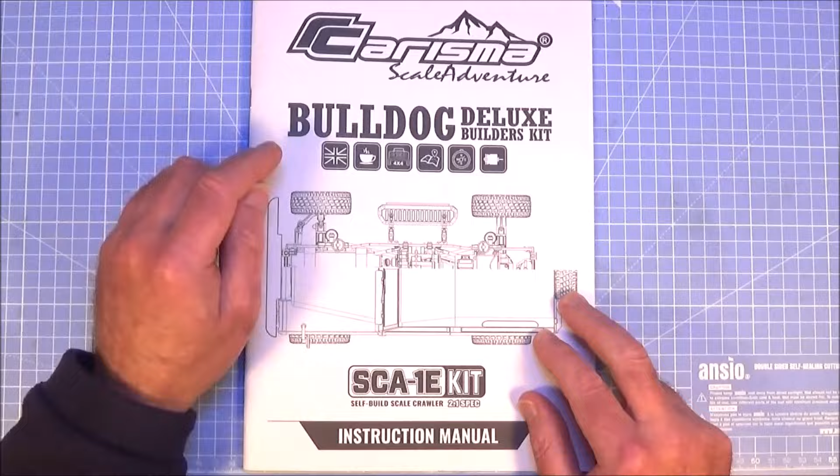Hi there, it's Mark here again and welcome to part 3 of my build guide for the Carisma Bulldog Deluxe Builder's Kit, which is on the SCA1E 2.1 spec chassis. We got to the end of parts bag H last time, which was building the gearbox, as you can see here, ready to go. So let's crack on with the build.

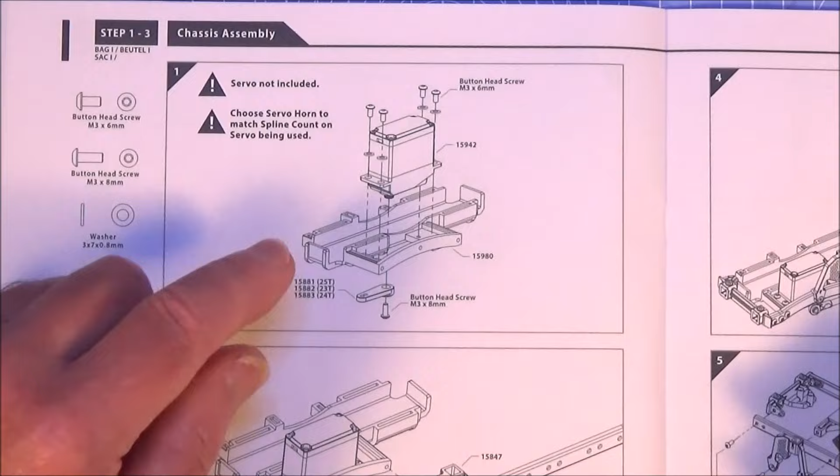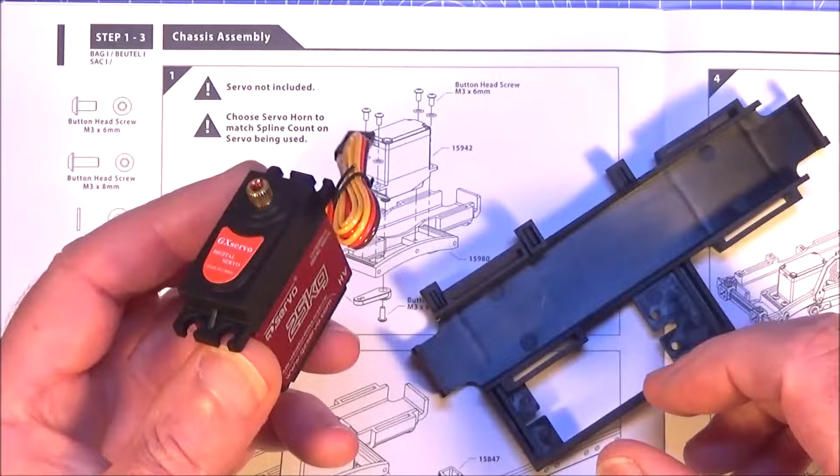And the next step is to open up bag I, and step 1 is the servo, fitting the servo to the plastic bracket, which is this part here. So basically align the bracket in the same orientation as in the diagram. Get your servo. As you can see, I'm using this 25 kilogram unbranded servo, or actually it's a QX servo, and I've gone ahead and centered this up, so make sure you connect this to all your electronics. Get your transmitter in neutral, give it a wiggle around and make sure that goes into the neutral position before you do this.

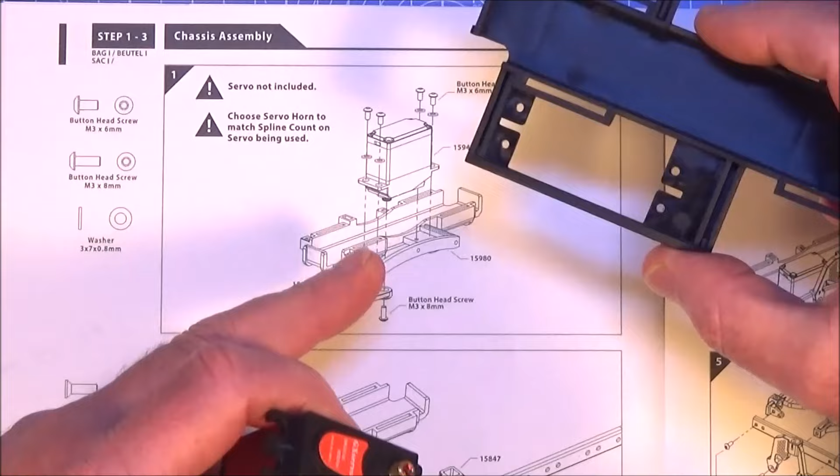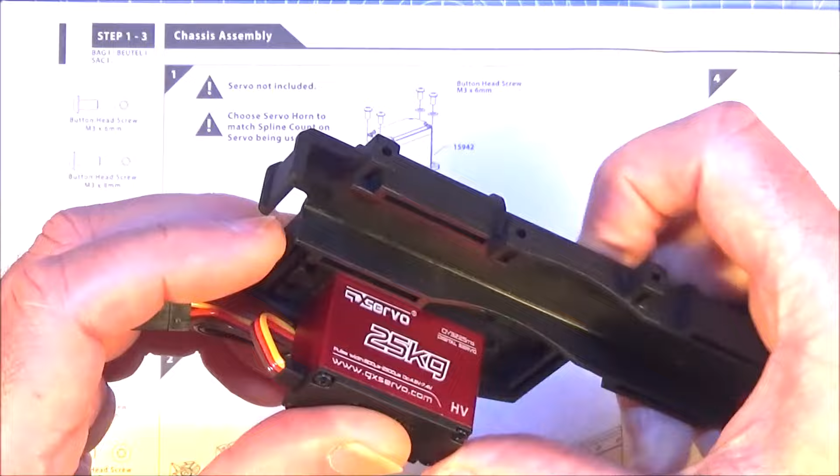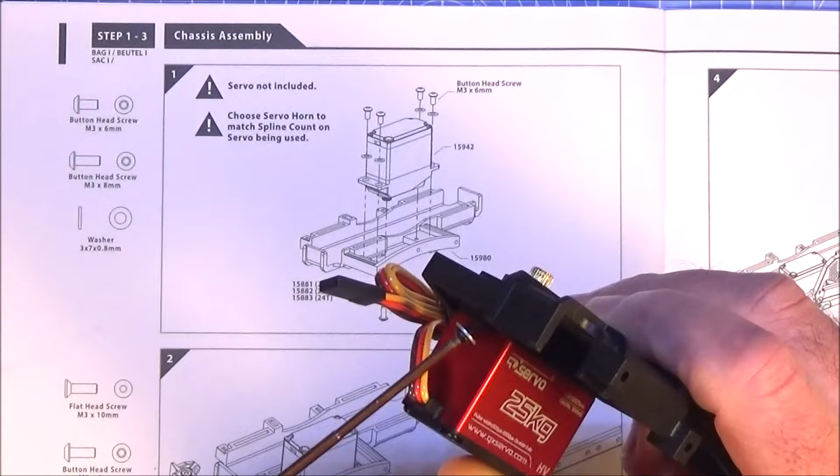Okay, so what we're going to do is fit it as it shows there, which is with the output of the servo pointing to the front, and that just pops onto there, and there are 4 holes that we've got to get the screw through to. For that you've got 4 3x6 screws, and put the little washer on there, and basically just simply fit the 4 through the servo and into that plastic bracket.

Okay, so hopefully you can see the 4 screws are in now, and they are very short, so don't try and torque them up too much because they only go into the plastic 2 or 3 millimeters. But with 4 of them I think it's strong enough to hold that securely. So we just flip this over and we've got to mount on our servo horn.

There are 3 to choose from that will fit your servo in the kit, but I'm not going to use these plastic ones because I've got an aluminium hop-up, which is this little beauty here, and this needs to be aligned pointing straight to the left as you look at it now. So get it as straight as you can. It won't ever exactly line up to being horizontal like that, but get as close as you can.

And this servo has got a metal output, so I've put a bit of thread lock in there, and it's just a 3x8 screw that holds that on. And this servo horn has got the extra security of these little screws that clamp it onto the servo output, so that's a nice little feature with these servo horns. And that's the end of step I1.

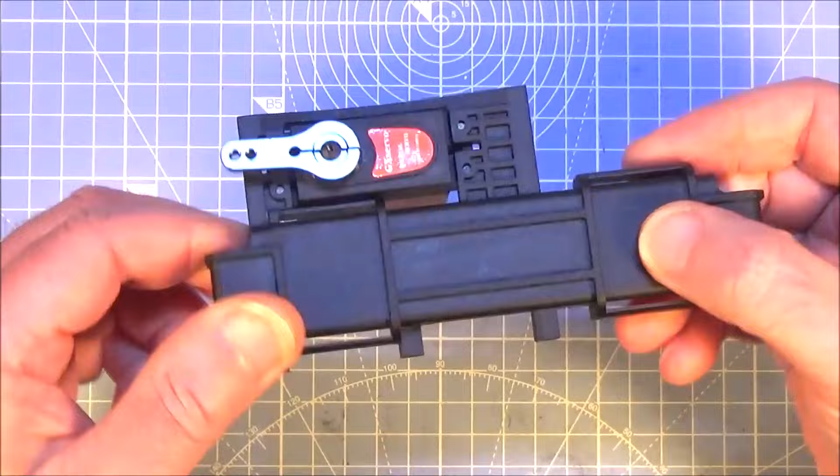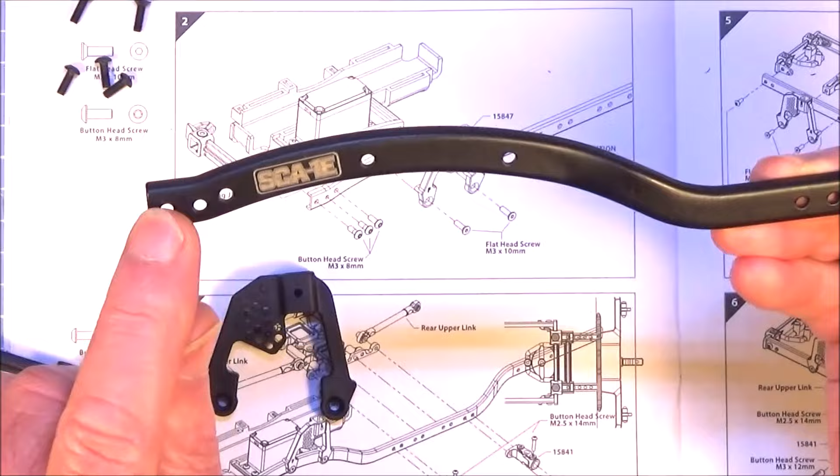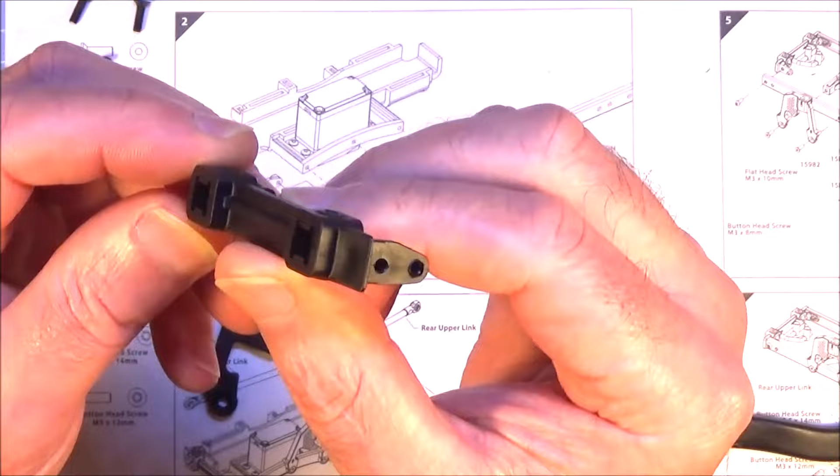For step I2 you're going to need to get your metal chassis rail out. Make sure you get the right one with the arc like this and the 3 holes at the front. Get another 3x8 in the hole at the front here. You also need this bracket here, which is from bag J. I think it's kind of like the front bumper mount. And what I'm going to do is connect this to the front of the rail there with 2 3x8 button head screws.

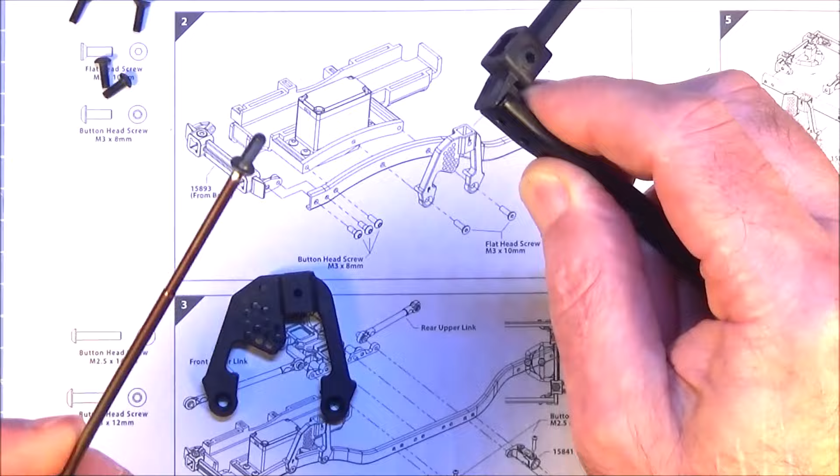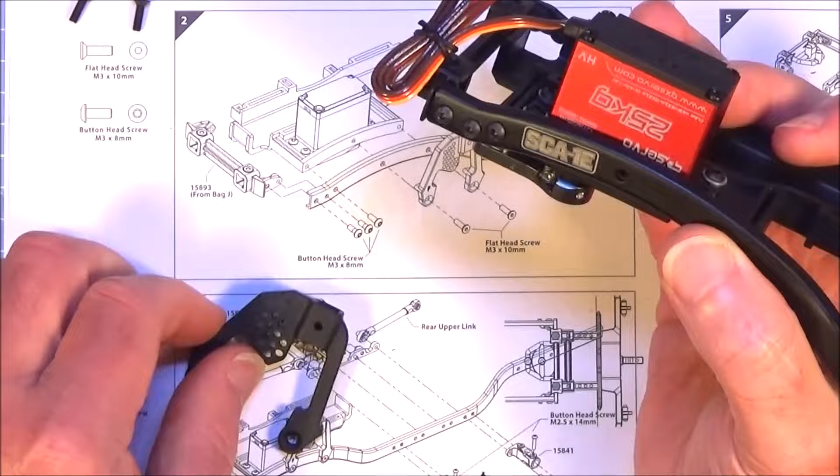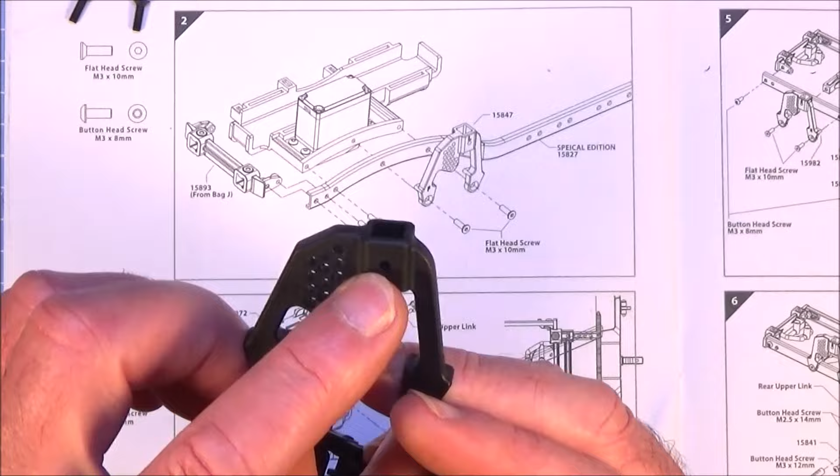Then we've got to get our servo mount and line up the 3 holes in this with the 3 holes in the chassis rail. Okay, once that one's done up, you need to get the front shock mount, and it does say on it, I don't know if you'll be able to see in this light, but it does have an F and an L printed onto that bracket, so that's how you know you've got the right one, and that lines up on the 2 holes that are left.

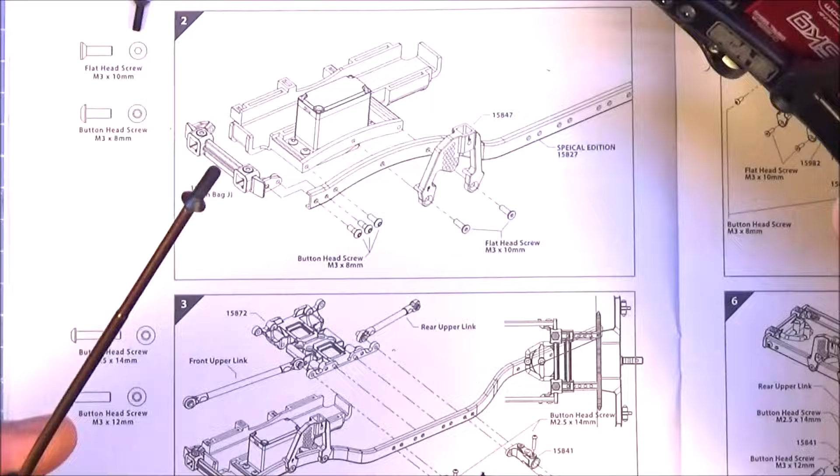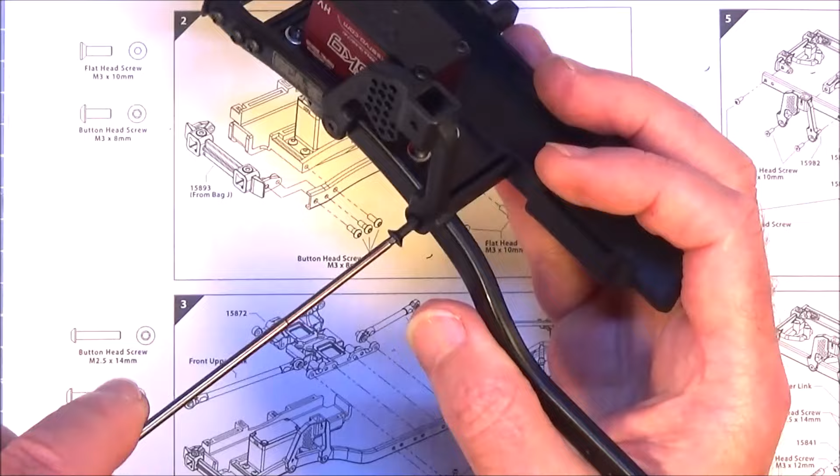And then you've got 2 flathead screws, which are actually countersunk, that are going to go through that bracket, the shock mount, through the rail and into the servo mount. So I'll just get the second screw in the second hole, and that will be the end of step 2.

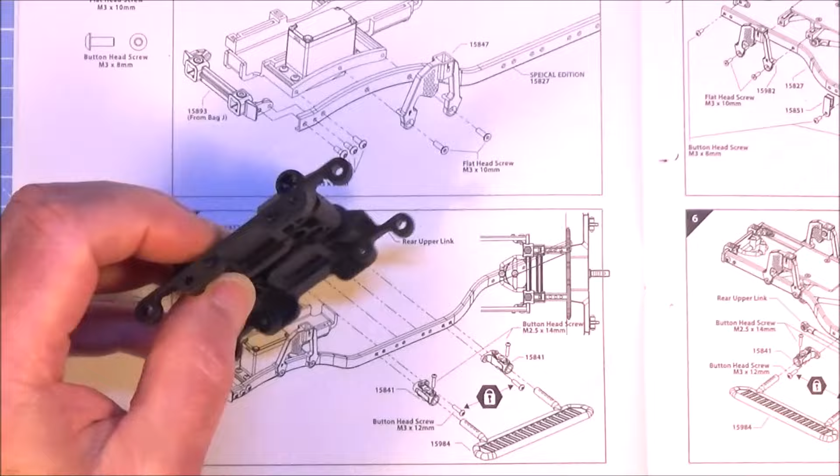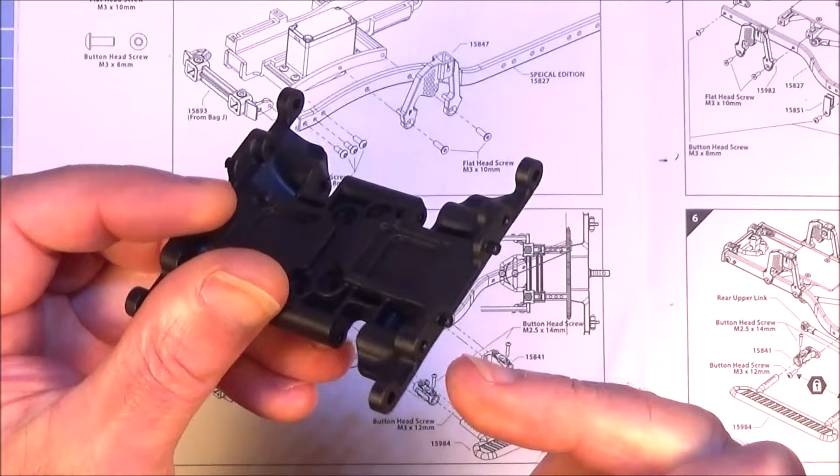In step 3 we're going to be fitting this plastic part, which is like the central part of the chassis that holds the motor, I think, or the gearbox, and it looks like this. Make sure you've got it the right way around, and then we've got to put the 2 lugs that are sticking out there into the 2 holes that are central on that straight part of the chassis, so like that.

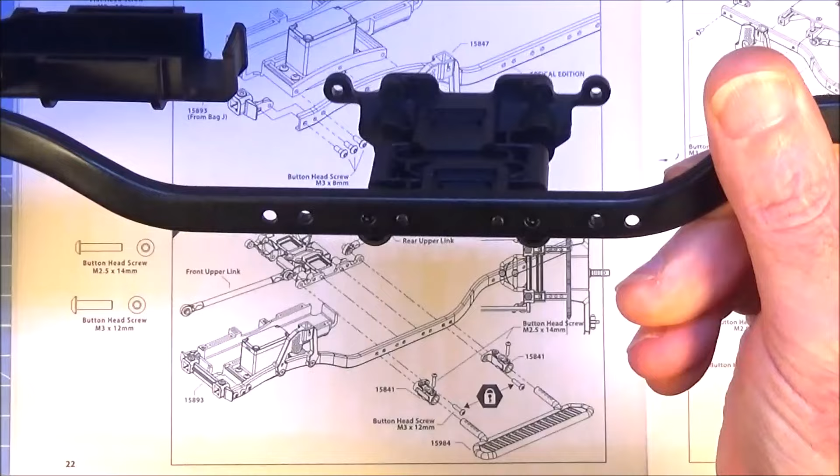Then you want these little plastic brackets. We've got 2 of these, one at the front and the back, that's going to hold that bracket and the upper links. So if we just first put the screw through that hole, then we're going to go into that hole there, just get it started. Then you've got your front upper link,

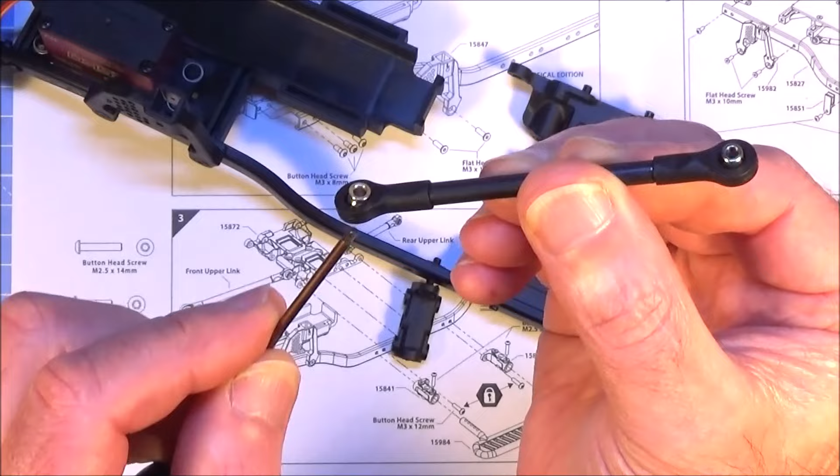and you want the end that's got the thread in it and the flat end rather than the standard ball, and you want to put the screw into the side that's got the flat on it, so not the straight end but the flat side, and I have put some thread lock inside that ball. So just get it lined up with that screw, and I'll go ahead and tighten that up.

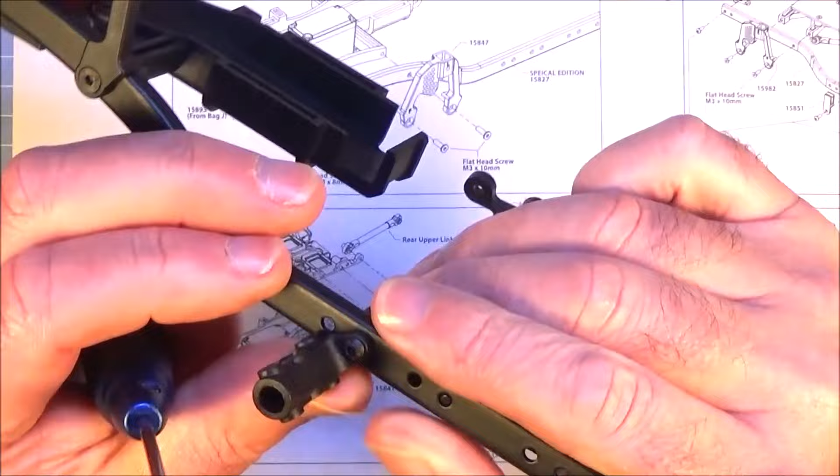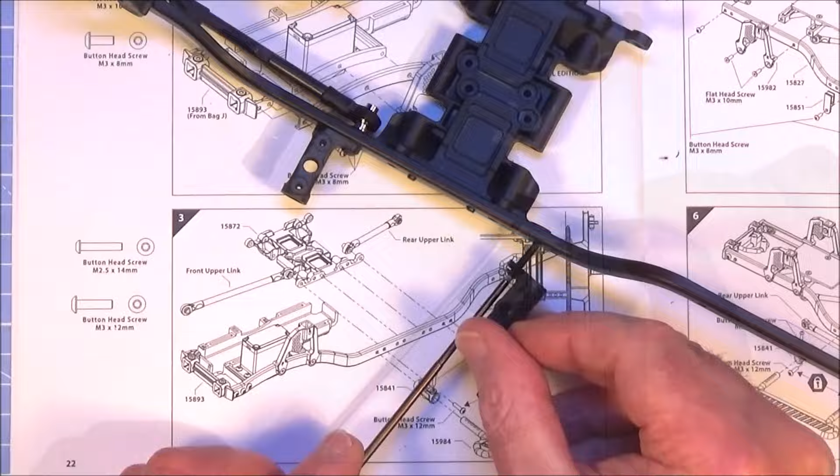As we've got it tighter, just need now to make sure that that is aligned like so. I'll just give that a little nip up. So then we'll do exactly the same, get another one of those brackets and pop that through. And it goes through that hole again, which goes into the plastic central part.

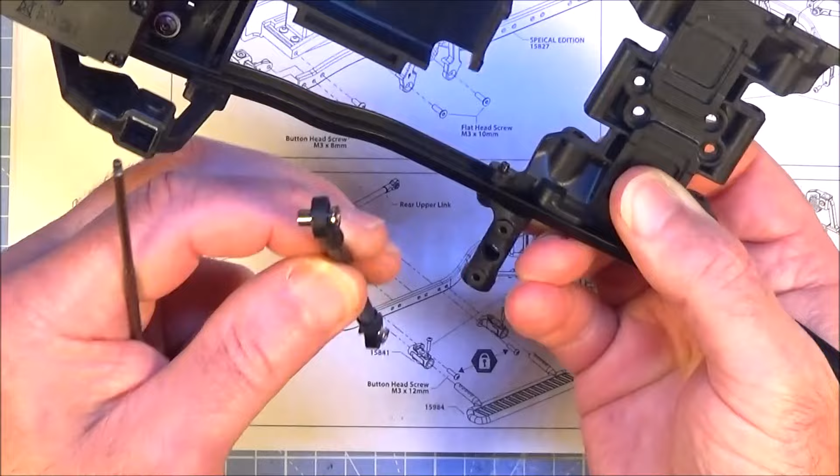Get the front upper link, and again what we want to do is get the flat of that end with the thread in it, and we're going to screw into that through the bracket. I don't know if you can see out there, it's a bit fiddly, but yeah, we'll just nip this up. And as it's getting tighter, what we're going to do is get that bracket, and we need to align it correctly, so it needs to be in that position like so.

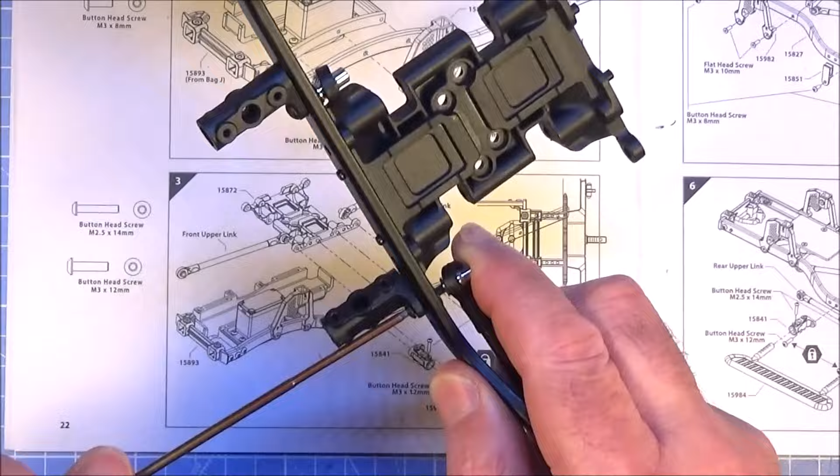And then for the other end, same again, get your 3x12 screw, put it through that plastic bracket, and we're going to go into that last but one hole, and then get the threaded end of the rear upper link, with the flat going towards the bracket, and do exactly the same as we did to the front, just nip this one up, and then you just get your slider bracket, and that's going to pop into the plastic pieces there if they're in the right position.

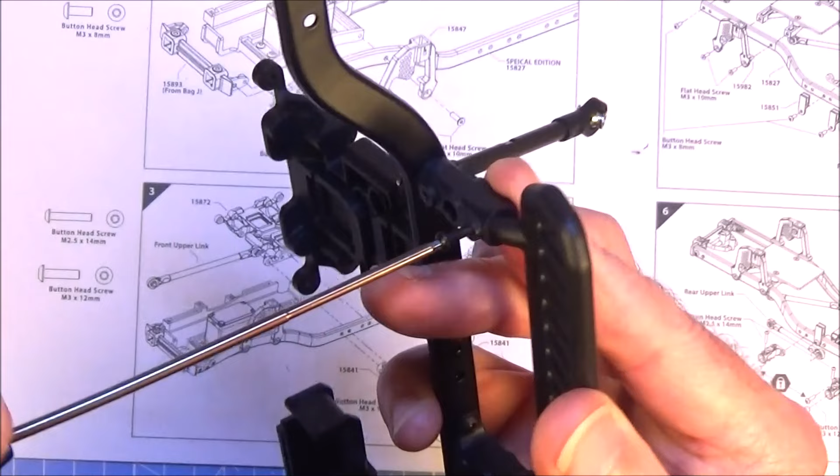And then you've got two of these M2.5 by 14, so they're a bit thinner than the other ones we've been using, the M3s, and you want to screw one into the outside of the holes in those brackets, and then fit the other one in the same outside hole on the other bracket. And when you've done that, that'll be step 3 finished.

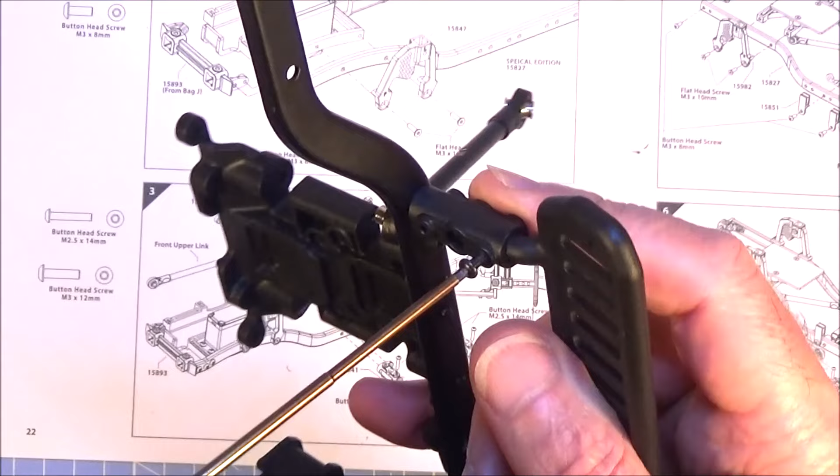But I've got to say, it really is hard to get these little screws started into the plastic. The holes don't seem to be quite big enough, but if you apply a bit of pressure, they do go in.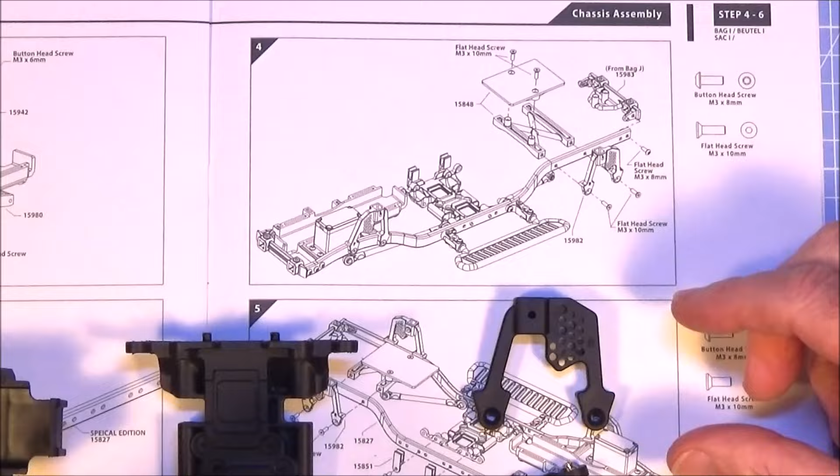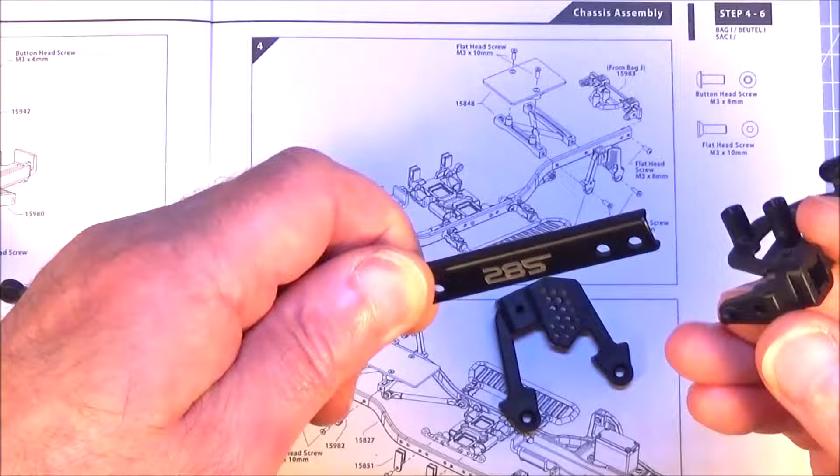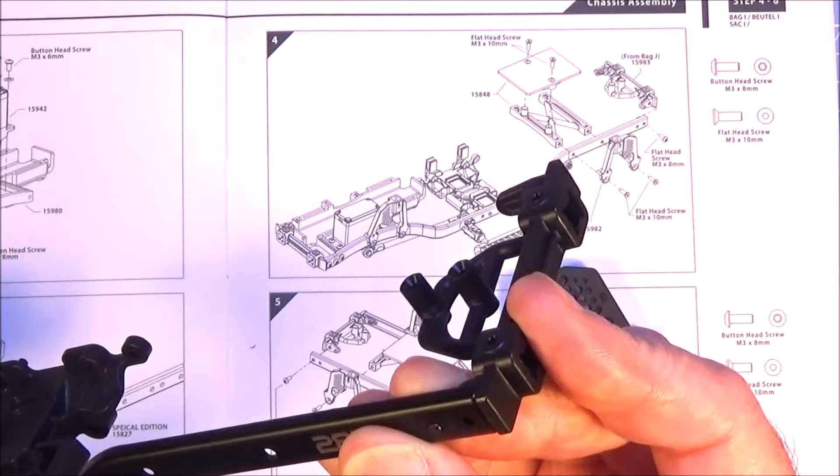On step 4, we're going to fit the rear shock mount, and we've got this again from bag J, this bracket. Make sure you get it in this orientation. There's the two holes at the rear of the chassis, and there is a lug that's going to go and fit through the one hole. You might just be able to see there, and then it's a 3x8 screw that just goes in the hole at the back and holds that bracket on.

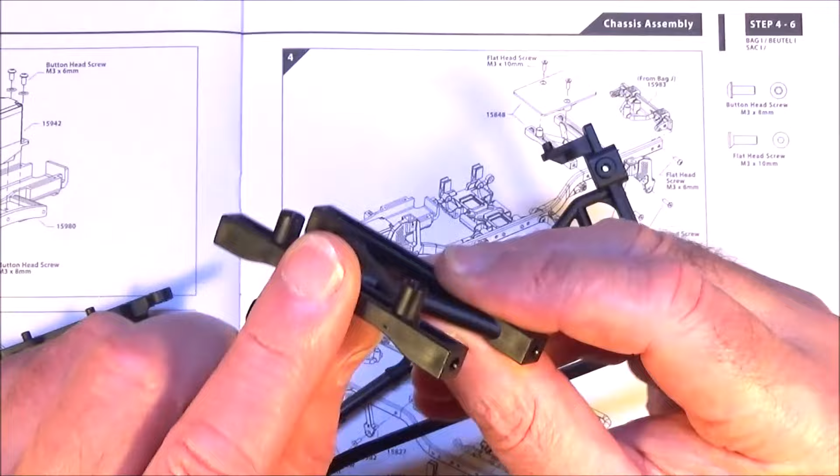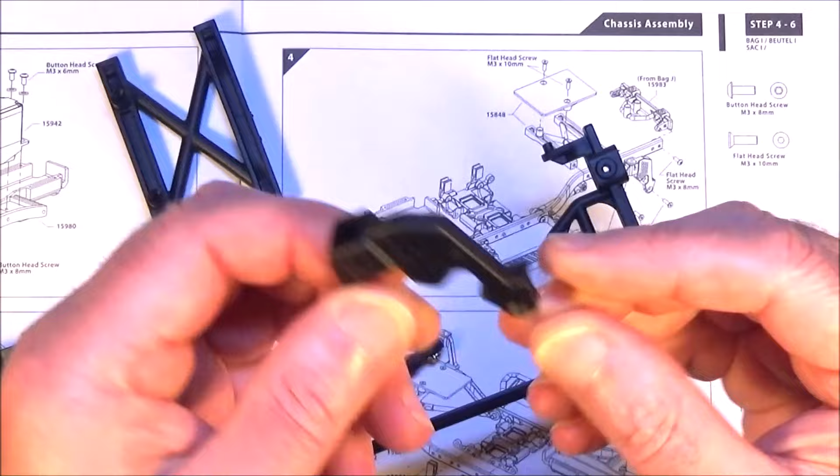So with that attached, then you want this kind of cross bracket, and you want it in this alignment with the kind of lugs pointed upwards. And then you want your left rear, again there's an L and an R printed on there, so that's your left rear shock mount. And again, this is going to go onto those two holes there, and it's going to hold this bracket.

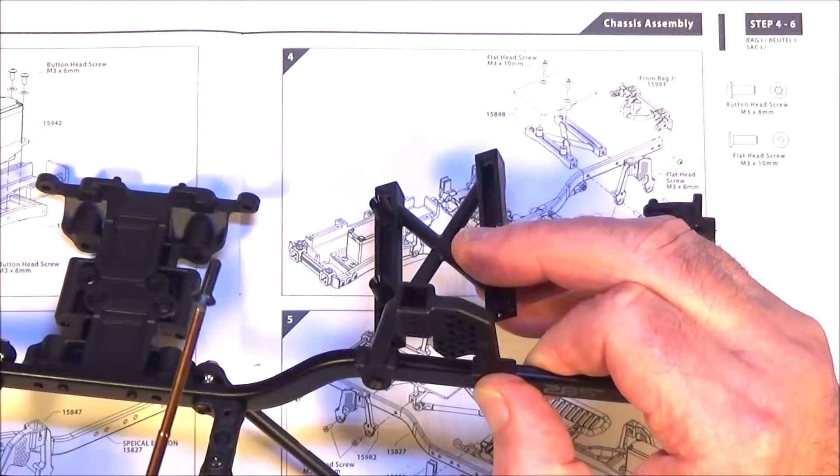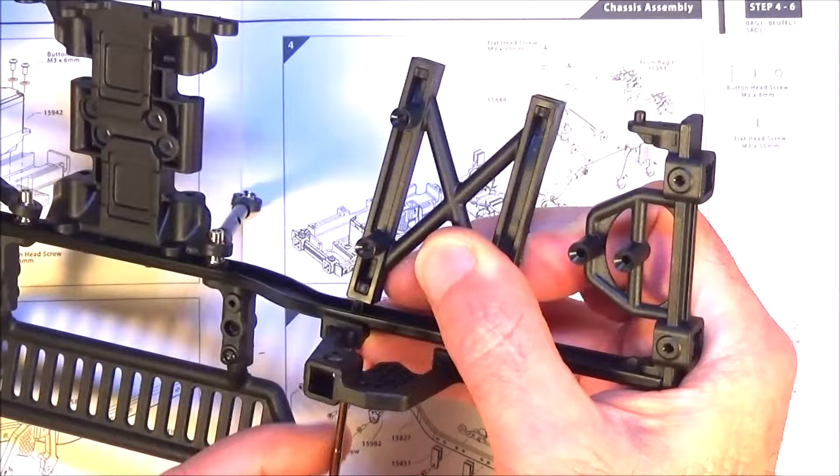Again, a bit fiddly, so get your countersunk 3x10, pop that through, and then get the cross bracket and screw that 3x10 into the hole in the end. As I said, it's a bit fiddly, but get this one done up, and obviously the second 3x10 countersunk goes in the second hole, and again screws into that cross bracket.

And with that attached, it's simply this flat bracket. It's got the two slots underneath, and they just slot onto those two uprights on the cross bracket, and it's simply held in place again with another two 3x10 countersunks.

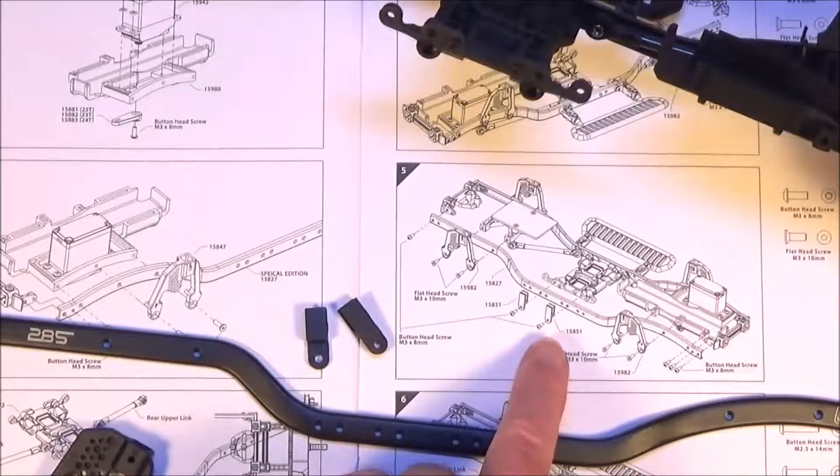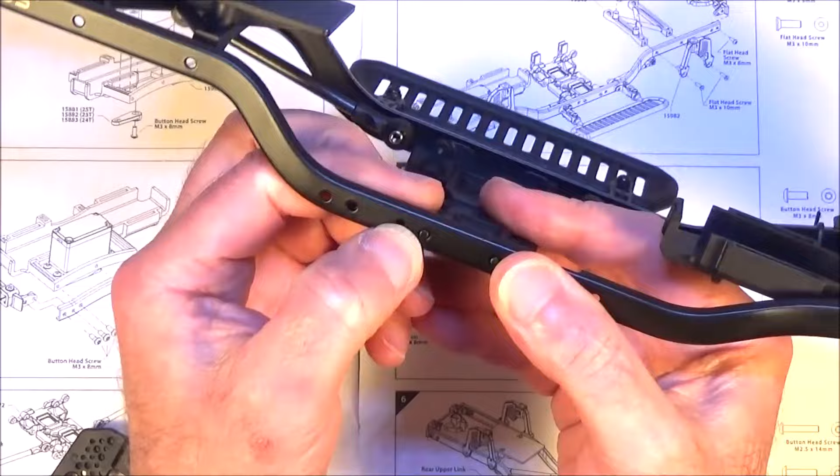So with that finished, we're going on to step 5, where we're going to turn the chassis round, and in this step you can see we're going to put on the other side rail, or the other frame rail, which is this. And I'm just going to start off again by clipping it onto that central part, so the two pins stick through the chassis there. Again, you can line up that pin in that end there. And fixing this on is exactly the same as we've already done for the other side.

So you've got your rear shock tower is going to go through there, the front shock tower is going to go on there. The only difference being these little clips that are going to go into the holes right next to where you can see those two pins sticking through. So it's going to go over that hole, again with the 3x8 button head screw. And as I said, these two little brackets will be the only difference from the way we fitted everything on the other frame rail.

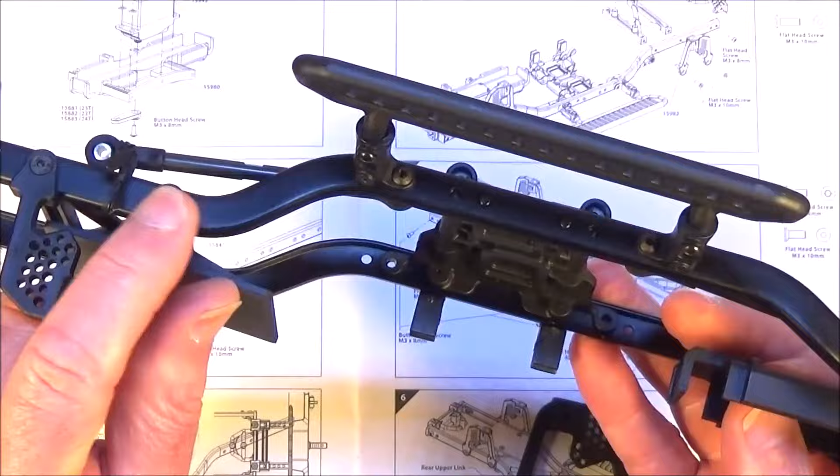And as you might have noticed, I've put some little ties around the front and rear arms because they would keep flapping around everywhere, getting in the way and get on my nerves. So yeah, I advise you do that as well. It saves a lot of hassle. So I'll just go ahead and fit on the two shock brackets and get all the screws in, and we'll have a look at step 6.

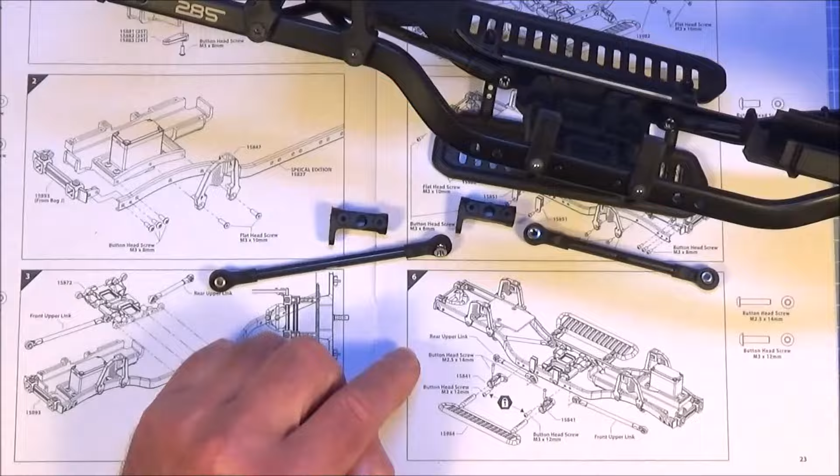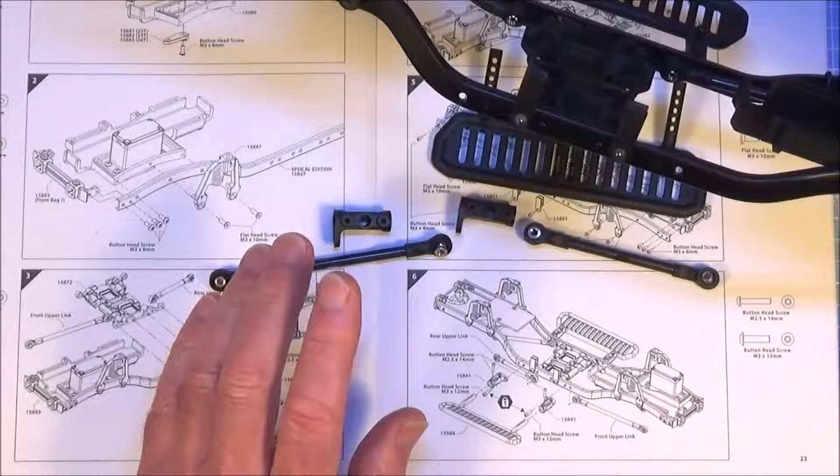Okay then, so that's what it should look like at the end of step 5, and we've got those brackets mounted. And as step 6 is just mounting the front and rear upper links again on those plastic brackets, and then the slider, it's exactly the same as we've already done, so there's no point going over that again. I'll just fit those and we'll move on to the next step, which is step 7, fitting the motor and gearbox.

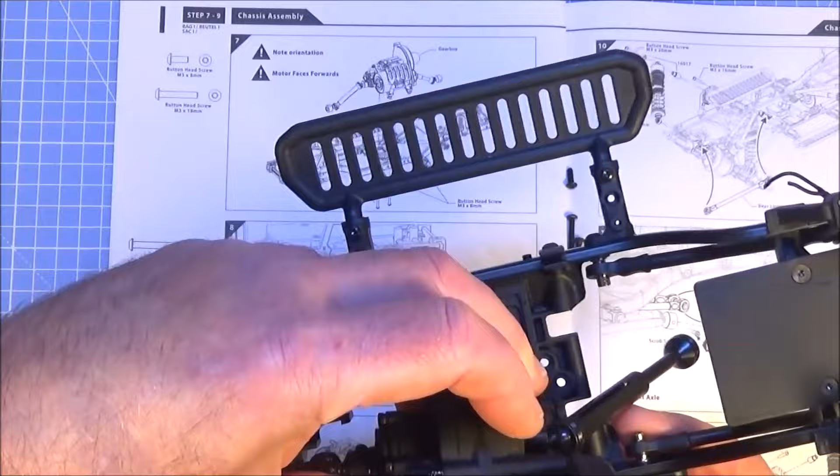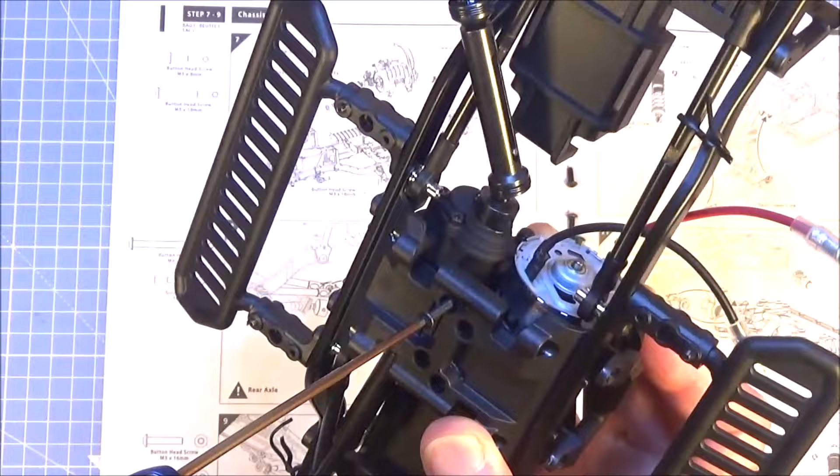And it says note orientation, so with the servo at the front, get your motor and gearbox with the motor pointing to the front again towards the servo, and just fitting those prop shafts, and it should just locate in the bracket in the centre. Yeah, it drops down into this bracket here, and then we've just got to get 2 of these button head screws, 3x18. I had to measure these because they're so close in this bag in terms of length. So that's 1 screw into the hole on the left and the other in the hole on the left beneath it.

Okay, so halt. It does say 3x18mm screws to go into here, but I cannot get them in. This one here, I've just stripped the head on this one. There's just not enough plastic to screw into, so I've put my own. You see that one there, that's stainless steel 12mm, and that does the job perfectly. So word of warning, just be careful with those.

You might have the same problem as me, you might not, but I'm going with my own 12mm screws in those 2 holes. And thankfully the other 2 screws, the 3x8s that go into this bracket here, 1 in the hole there and 1 in the other side of the bracket here, they go in okay. So yeah, just those 2, and that's the motor and gearbox fitted.

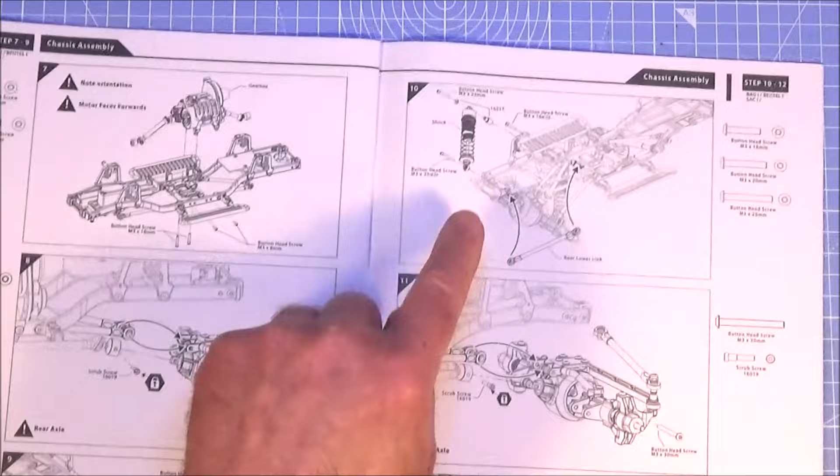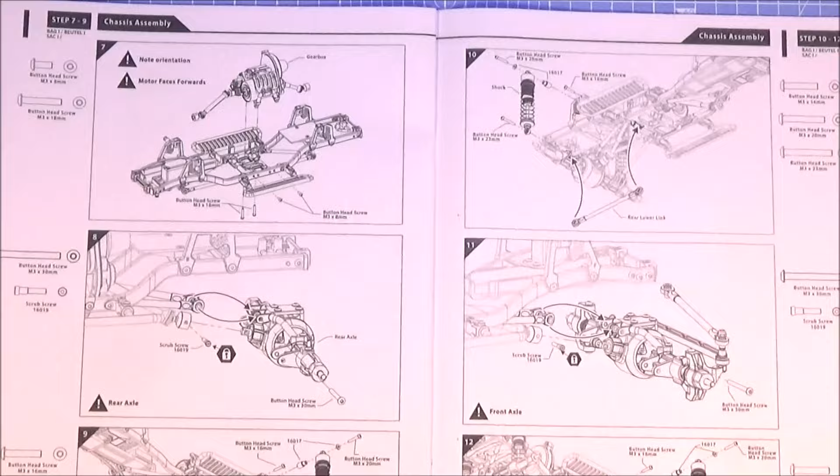In steps 8, 9 and 10, we're going to be fitting the rear axle, connecting up the prop shaft, fitting the lower links and the shocks. As you can see there, I'll just get this out of the way and do that all in one go. Okay, so first thing is get the rear axle, get it in this orientation, and we're going to pop this drive here into the prop shaft, try and line up the holes, get your little grub screw, and you should be able to just pop that in. It is a little bit of a fiddle, but I've got it lined up now, and obviously we just need to nip up this grub screw.

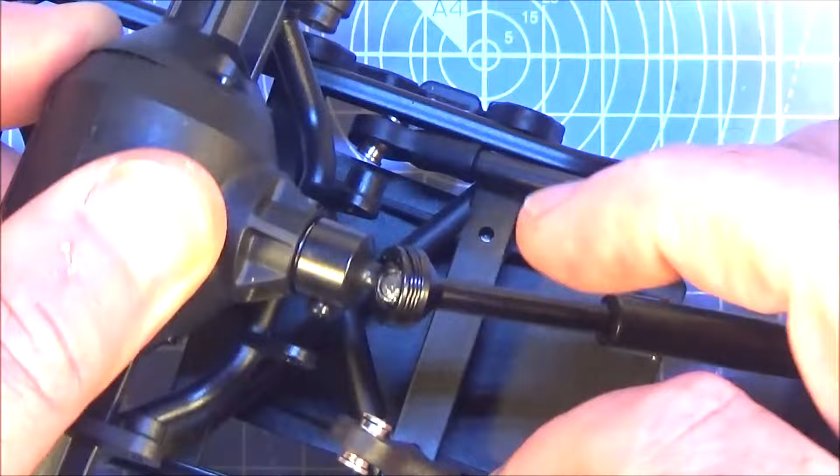And when you've got that done up, you want to get the upper arms, and they've got a slot into the bracket that's on the top of that axle, and then you've got your 3x30 screw, and that's got a thread through the one side. Probably a bit difficult to see this, and then get the other one on the other side of the bracket. Hopefully you can see that, and just get this screw done up, and that's the end of step 8.

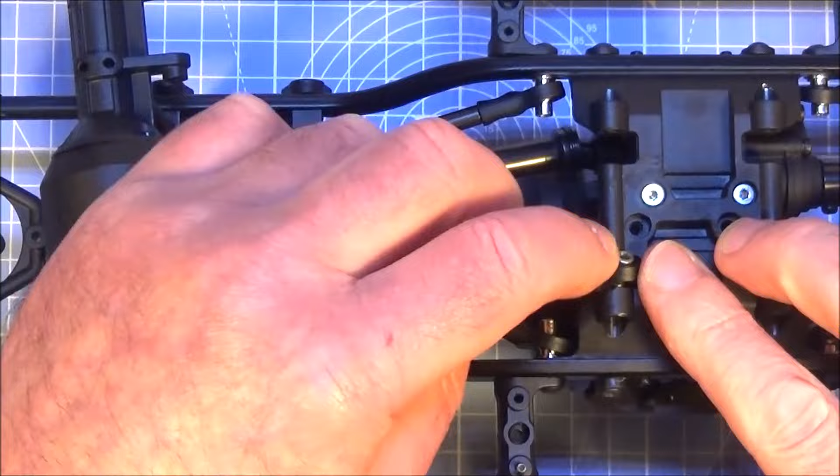Then you want to get one of your rear lower links, and we've got to force the ball end into this little slot here, like that, and that's held in place by a 3x16 screw. Goes in there.

Next you're going to need one of your shocks and a 3x25 screw, and again a bit fiddly, but we need to align these in the middle of these brackets here. Might be best to get the shock end in first, put the screw through, and then we've got to get that link in the gap. Yep, that is really fiddly to get that screw in there, but yeah, a bit of perseverance, and obviously just nip that up.

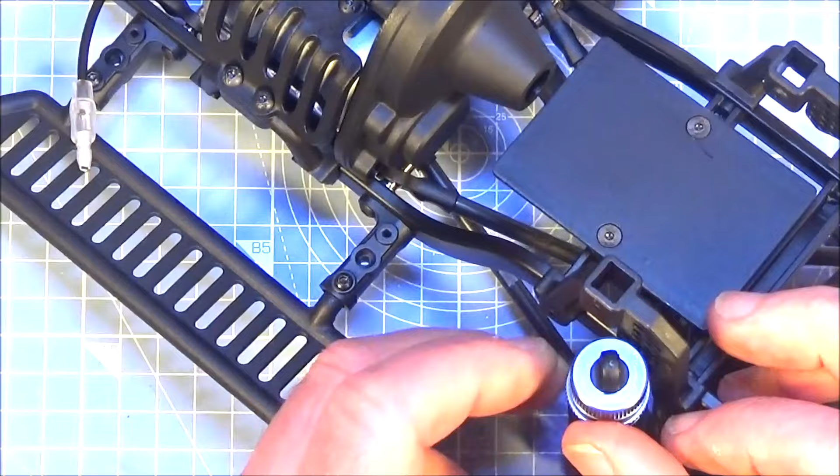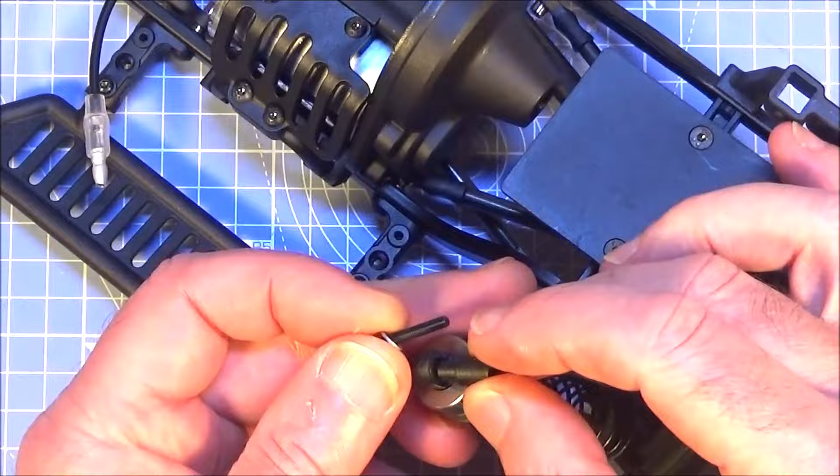Then we can just flip this over, and we've got to attach the top of the shock. You'll need this plastic piece, a 3x20 screw, and a washer goes onto that. Put the recessed end of the plastic part into the shock top, and then put that screw through, and it shows in the diagram to screw this into the top hole on the shock mount, like so.

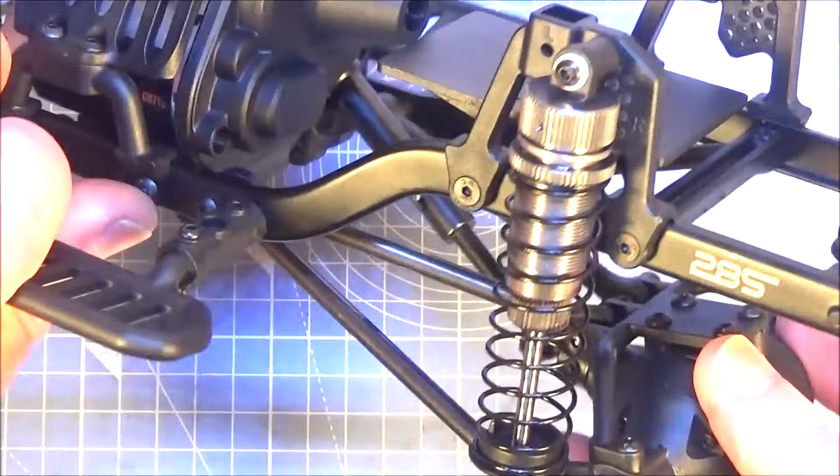Should look somewhat like this when you're finished, and I think the easiest thing to do now is to do exactly the same process but for the other side. So I'll just do that now and show you what it looks like when it's finished. So there you go, that's the rear axle completely fitted. You can see it worked quite nicely, everything moves freely.

One thing to note though is do not do these screws that hold the tops of the shocks on up really tight. I did that at first and it just clamps the top of the shock and there's no movement. Obviously that restricts the suspension somewhat, so make sure you slacken those off just a tad so there's a little bit of free play in the top. So yeah, that all went quite smoothly.

Right, so obviously now we've got to fit the front axle, but because it's the same, you've got to fit the prop shaft onto the driving axle exactly the same with that grub screw. You've got the lower arms that fit into these brackets the same as those, and the same fitment to the front for the shocks and those lower and upper links. There's no point in me going all through it again. You've seen how it goes together, so I'll just do that off camera. I'll be back in a bit.

So there we have it, that's the front axle installed. As I said, it's exactly the same as how to fit the rear one, but this is what it looks like, just in case you need a quick glimpse at that. And there's one last thing to do now, which is to fit the steering arm or the steering tie rod. I've already put in a 3x12 screw through that ball end, and we're just going to screw that onto my servo horn. Yeah, that looks pretty good.

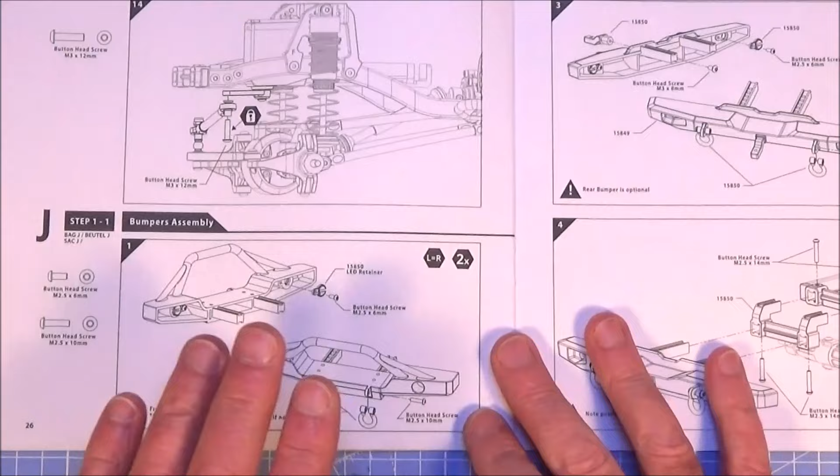And yeah, so I think, do you know what? That's pretty much the end of the actual chassis build for me, and I'll show you why. So we've basically come up to the end of step I-14, which was connecting that tie rod, as I said, and now it goes on to fitting the bumpers, and these bumpers are not used in the Bulldog version of the SCA1E. You can see it shows fitting them there, also these rear bumpers I think there, and then it's got fitting the wheels and tyres together.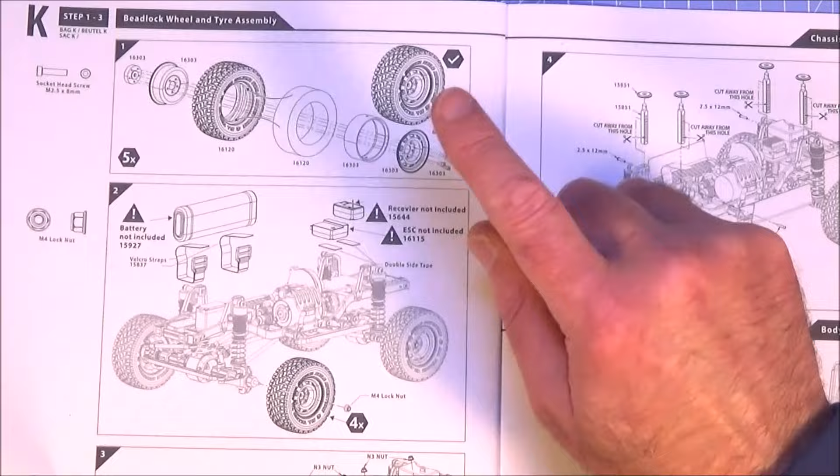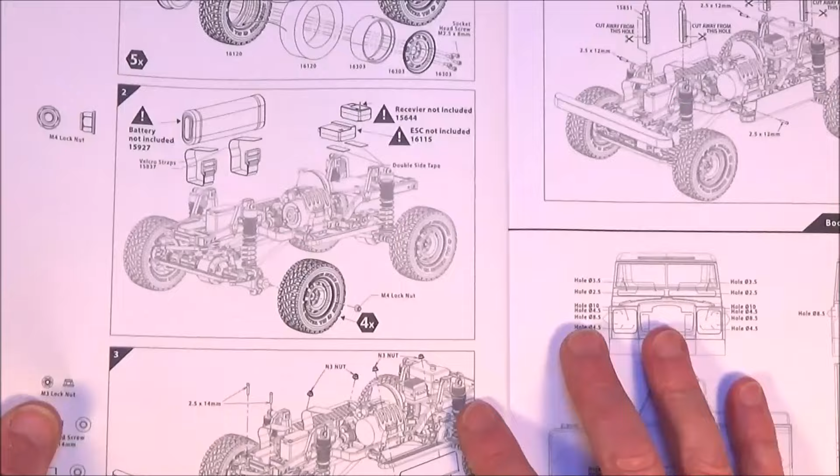Now I'm not going to do that because I'm going to spray my wheels, so I'm going to start the painting, so I'm not going to put those on. It probably would have been better if I'd have gone to the end of this build guide with the wheels on, but as I say, I'm going to spray them, so I'm not putting them together and then taking them apart again. And then you've got the bespoke Bulldog bumper there, and then you've got the body stiffeners that you need to fit on, and then it's just basically, yeah, starting spraying and cutting out the body.

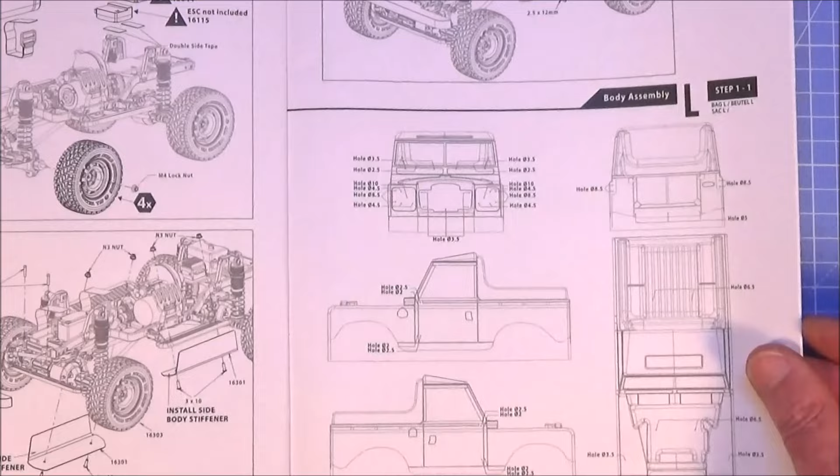So I'm going to call it a day. I'm going to call this the end of build guide part 3.